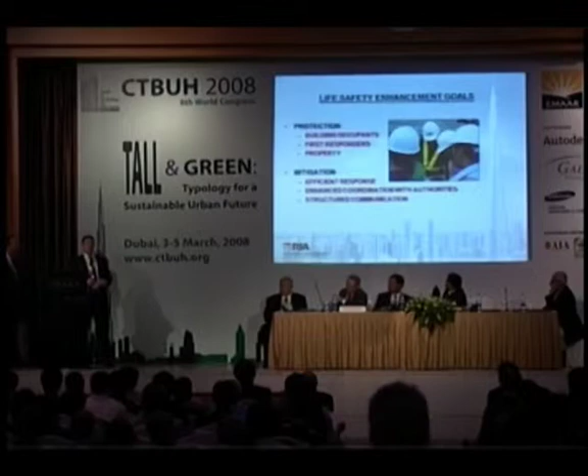So as we take a step back, you always want to identify the goals, and sometimes you get into a building code or a regulation and you're trying to find what the specific requirements are, but on a building like Burj Dubai, you really need to take a step back and identify what is the overall goal of the project. And first is you need to protect your building occupants. You need to make sure it's a safe environment to live in, safe environment to work in.

And then also, if there is an event, you're going to have your first responders come to site, and you need to protect them as well so they have the confidence to enter the building and to pursue any actions that need to be taken. And last but not least is you need to protect your investment, you need to protect your property, and you need to make sure that business continues.

We do understand that there's always the possibility that the systems we've installed will not prevent everything from occurring. So the next step is going one step further into the operations, and if there is an event, trying to mitigate that event to make sure that you have the most efficient response possible and that you can have an enhanced coordination with the authorities so that when they come on site, they're updated, they're up to speed, and they have all the information they need to base their operations.

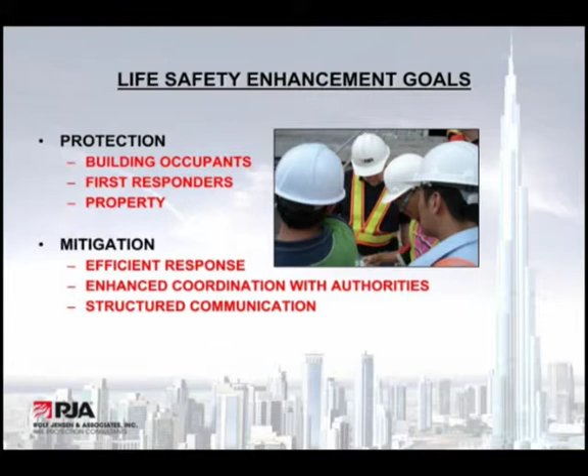And also, we need to make sure that lines of communication are open, but we also need to make sure that they're directed in the right manner, because we don't want two people trying to fight the same effort and trying to push and pull. It just reduces the efficiency of your response.

So, like we'll find in most high-rise buildings, typical building codes would classify a high-rise building as anything over 8 to 10 stories. Well, what do you do at 160? So we're going to first go over some of the basic requirements. Throughout the last couple of decades, automatic sprinkler systems have been required in virtually every high-rise building. And that is to control the fire, make sure that the fire or smoke is not generated in a manner that the building systems cannot tolerate, and also by identifying zones within your building so that if a fire does overcome a sprinkler system, that it can be contained to a single floor so that the zone of incident can be identified and can be manageable.

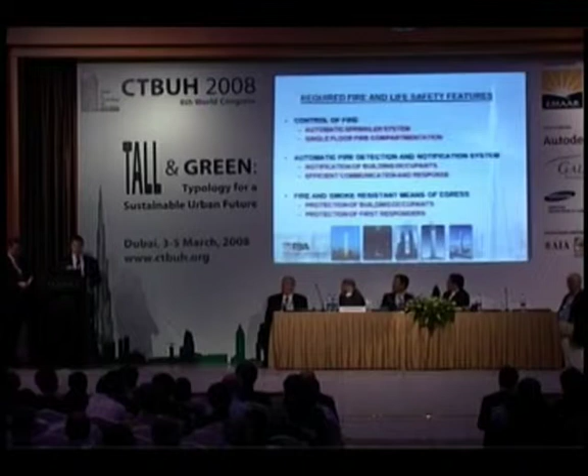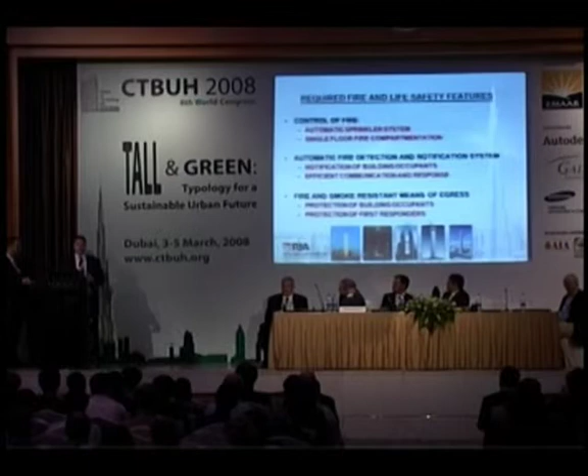Also, if there is an event in your building, how do you tell somebody on the 160th floor? How do you tell the workers, the residents, that there is an incident from the fire command center or from the security desk? So you're going to want a way to notify and, well, first off, to detect an event. And we've gone through the process of identifying ways to notify occupants by floor, through designated areas of the building, stairwells, areas of refuge, so that the information gathering can be enhanced and you can create a more efficient response.

And then also, if there is an event that requires occupant relocation or building evacuation, you need to make sure that you can protect those occupants as they proceed to a safe area of the building. And that's by protecting your stair enclosures, protecting critical service areas in the building, and also protecting the first responders so that they can approach the fire and they can get to their staging area without having to worry of the threat spreading before they can get there.

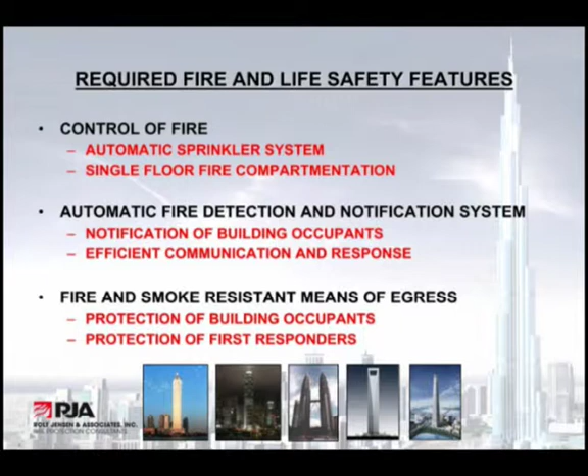So now we'll move on to the meat of the presentation. Okay, we have the requirements. We know what we need to do for a 10-story building. What do you do at 160? There are a number of enhancements that we have recommended, and it is truly amazing how proactive Emaar and SOM have been at prioritizing these enhancements and implementing them in an efficient way. As Adrian mentioned in the morning presentation, one of the enhancements is areas of refuge. Areas of refuge is a very key enhancement for buildings of this size.

What they do is they give us flexibility in how we can respond to an event and how we can relocate occupants. We've identified 4 areas throughout the building, and they are sized so we can accommodate 3 floors. Now, ideally, you'd like to make sure you can relocate all the occupants in a building. However, we've taken an approach to evacuate occupants in a staged evacuation.

We're going to identify the fire zone, we're going to identify the adjacent zones that may be affected, and that is the floor of a fire, 1 floor above, 1 floor below. And those occupants would be notified of an event so that they can relocate down to the nearest area of refuge and they can wait further instruction. The rest of the occupants throughout the building will be notified that there is an event. However, at that time, it may not have proceeded to the point where we'd go through a full building evacuation.

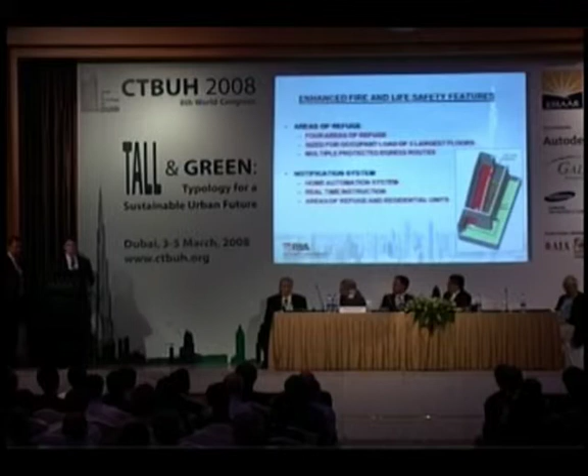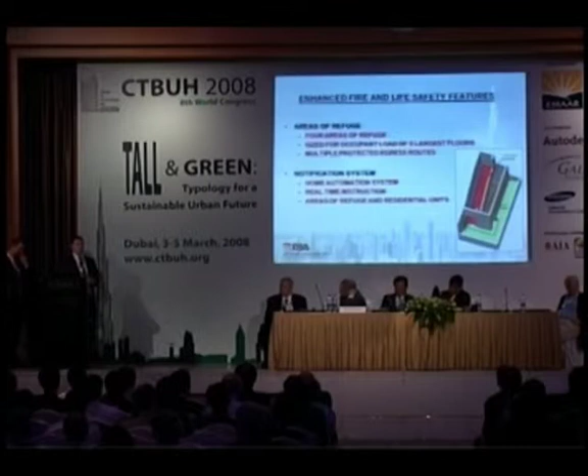And also what it does is the areas of refuge connect the egress stairs so that as soon as you enter one of those exit enclosures, you're protected. You have a fire-rated barrier surrounding you as well as mechanical systems to prevent smoke from coming in and compromising that stair shaft. And it allows you to transfer from one stair to the next. So for instance, if one stair zone is compromised, you're able to direct occupants to another stair without leaving that protected space.

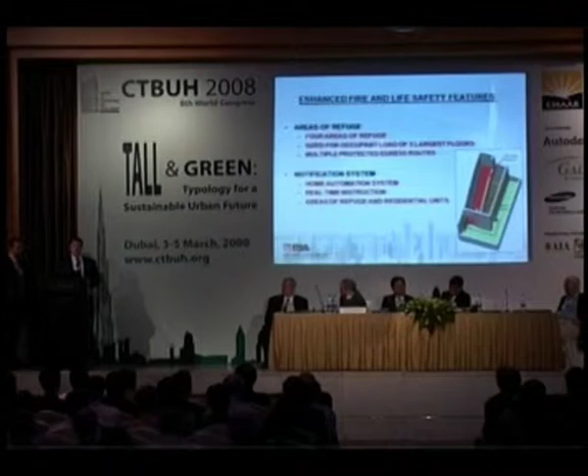As we mentioned, we're going to have a notification system, but we've gone a step further in enhancing that. And if you enter the building, you'd probably never even know it was there. This is the home automation system, which will be installed in various areas of the building, including areas of refuge, and including every dwelling unit, hotel and residential. And that will be an LCD screen that will provide occupants with daily information. It'll be an interface for them to communicate with different building staff.

And then in the event of emergency, we're able to override that and take control of it and provide instructions whether or not they should stay in their unit, whether or not they should proceed to the stairs, and gives them more information so that they can validate any concerns that they've had of an alarm. And it will also provide us with real-time instructions so that you can send a customized message instead of just a pre-recorded voice communication.

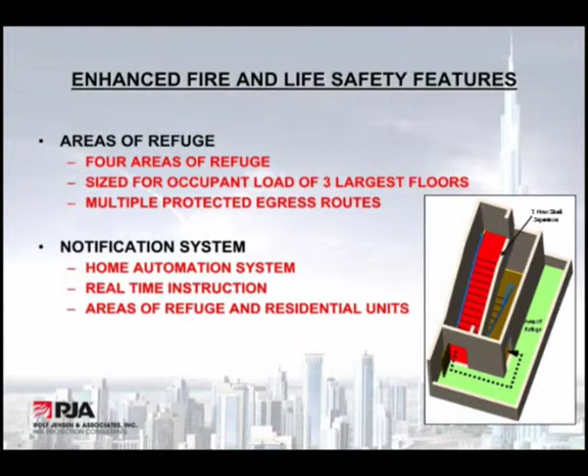Moving on, a very hot topic in fire and life safety today is the elevator-assisted evacuation. And you'll hear more about that tomorrow in the fire and life safety session, one or two, I believe it's 1. But elevator-assisted evacuation is something that has been frowned upon in the past, and it's just unsure whether or not it's a protected system that can provide reliable service for evacuating occupants. We haven't taken any concession for that, but we've added it.

So all the stair enclosures are designed as you typically find in a high-rise building to evacuate occupants, but this is going to be used to provide a protected means to evacuate occupants. It includes water-resistant equipment, includes raised door thresholds at the elevator shafts so that we limit the amount of water coming into the shafts. And it also includes video monitoring capabilities so that before they begin operations, the first responders or building staff can send each cab up and down each hoistway to inspect it to make sure that it's not compromised.

The elevator-assisted evacuation is a very important enhancement because when you're looking at a building that's over 160 stories, you start thinking, okay, well, now is our evacuation time starting to exceed the time we've built into our critical systems? And the elevator-assisted evacuation, we've done a couple of studies on it, and we have found that the scheme that was chosen was in an ideal situation. There's a number of different factors that come into a full building evacuation. But comparing just an ideal scenario of evacuating through stairs versus evacuating through an elevator, you're able to reduce your total building evacuation time by almost 50%, which is pretty amazing when you're talking hours.

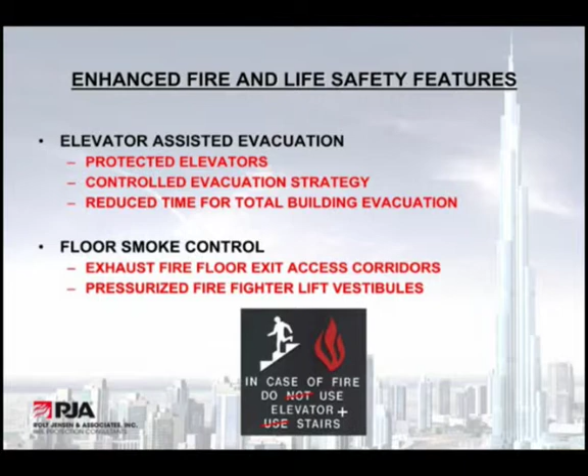And then the last enhancement I'd like to go over is we've also integrated a floor smoke control system. So if the floor goes into alarm, the corridor is exhausted, to give the occupants a little extra time so that they can get into the corridor and into the protected stairway. And the last enhancement John will discuss is regarding the operations side of things, which is another very proactive approach that Emaar has taken.

Thank you. One of the things that we have to look at from our standpoint is how do we manage the building once it's open? A lot of the talk the last few days and tomorrow is about sustainability, about design and architecture. Our focus, once that building is operational, is how do we manage the worst case scenario? What we've done is we've looked at it, and Emaar has been so proactive in thinking like this that they got us involved in developing a comprehensive crisis management plan starting in 2005. So we started way back in 2005, starting to think about all the different scenarios that we might have to face with a building of this size and nature.

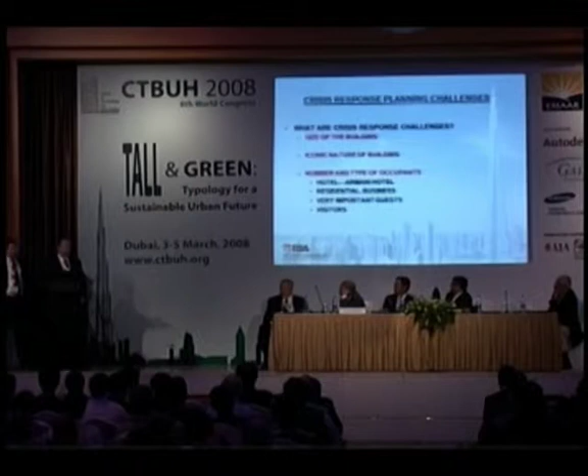First, I think the key issue that I face coming from a fire protection company is there's a misconception that the only crisis that's out there is fire. Realistically, in a situation in a building like this, in an environment like this, my biggest concern is not a fire because of the structure and the systems that are in place. It's more of a situation in the middle of July when the generators fail and the electrical system fails. And now I have a full building of occupied floors, and now I have to get them out. And that's a bigger concern to me.

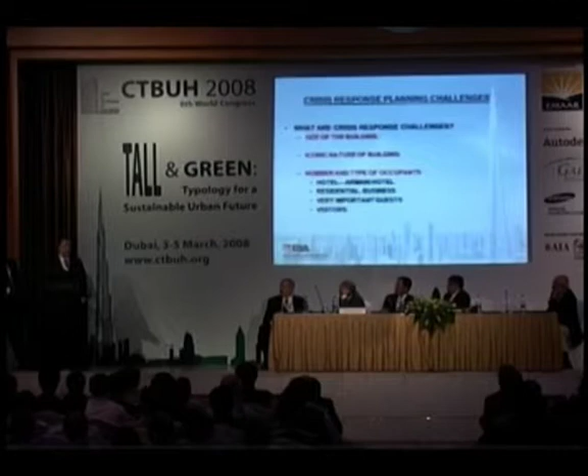What are some of the challenges we face? We face the pure size of the building. It's 160 floors. It's a large building, and it's spread out over a lot of area. The iconic nature of the building. Obviously, it's going to be the world's tallest building. It also becomes a target to somebody who wants to do something negative towards Dubai, towards the UAE, or towards a U.S.-friendly ally. So we have to build that into our responses.

And also the number and types of occupants. This building is going to have a hotel, which is an Armani hotel, which brings its own classification of VIPs. We have residential and business occupants. We have very important guests. We might have former heads of state that come here. And we also have visitors. We might have a wide range of visitors from a toddler at 2 years old to somebody that's 85 years old. And we have to build all this into our response procedures. And that's why Emaar got us involved very early on in 2005.

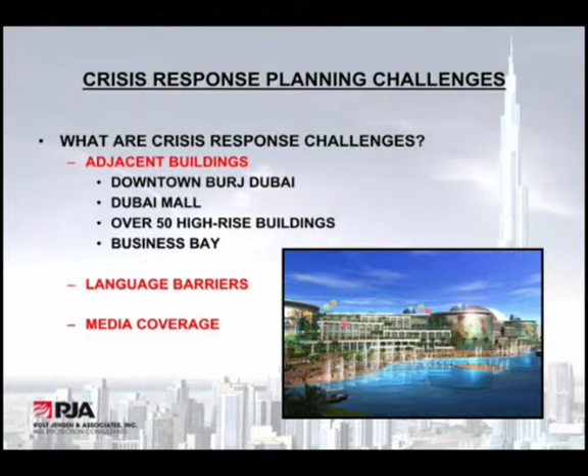Some of the other issues we have: adjacent buildings. As it was said this morning, it's in downtown Burj Dubai. Downtown Burj Dubai has over 50 high-rise buildings, including the Dubai Mall, which is connected to the tower. Now, the Dubai Mall is going to be what's considered the world's largest mall. It also has an occupant load that is ridiculous. So our concern is, how do we manage that? If something happens at the mall, we have to be able to understand how to respond to that, and vice versa. And also Business Bay. Business Bay adjoins downtown Burj Dubai, and there are parcels that are not developed by Emaar that we have to coordinate our responses with.

Language barriers. Everybody in this room can tell me the same thing. There are going to be language barriers. The concern we have is, how do we get our message out there concisely and uniformly, but in a way that somebody can understand what they're supposed to do? And obviously media coverage. I think that speaks for itself. If something happens at the building, it's going to be international news.

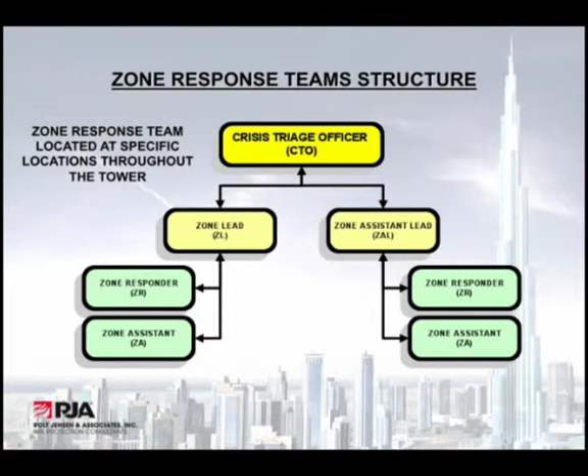Also, we identified zone response teams. As I talked about, we have to have zone response teams that are organized. We want to make sure they're identified to be able to help out in their zones. We wanted to identify the building services people that are there because they know the building. They know what's going on on their floors. Instead of trying to send a group of people to a floor that they don't know, we'd rather use the people that understand what the operations are. The other thing we wanted to do was make sure it was a clean structure, because we wanted to make sure the information flow during a crisis was a uniform flow from the crisis command team to the people that need the information and back.

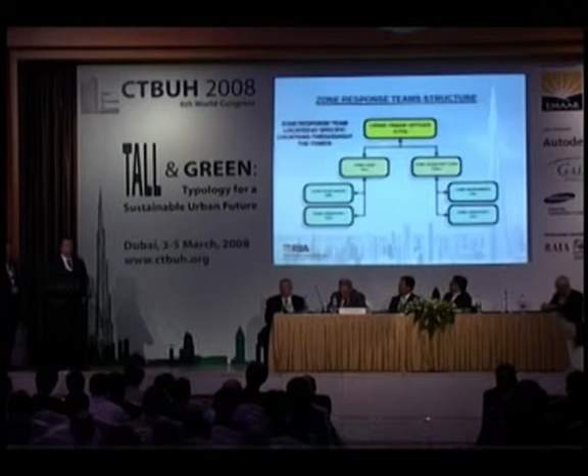The crisis levels: we wanted to create a scalable response level. Anywhere from a crisis level 1, which is a situation — an example would be somebody has a heart attack. It doesn't affect the 160 other floors, but it affects that one person. As opposed to a level 4 emergency, where it could be multiple building zones in a fire situation, and it requires a different response.

Well, this is just a brief list of the response procedures that we've developed. We broke them down into 4 different categories. We looked at building system related situations, human related, terrorism related, and weather related. We also added a tsunami response procedure. It's probably not going to happen in Dubai, but you never know. We wanted to make sure we had it in place just in case something happened. And each of these has 4 different response levels tied into the overall procedure.

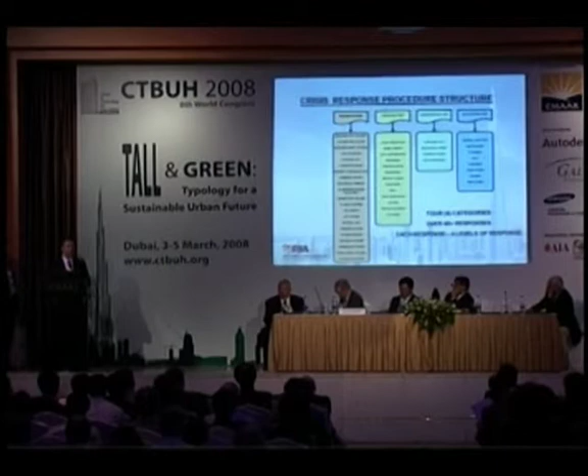One of the key questions was about evacuation. Not every procedure requires an immediate evacuation. It might need a shelter-in-place response as the initial response. All we're trying to do with these documents in our crisis response plan is to provide that initial response until the civil defense or other local authorities arrive. Once they arrive, we become a subset to their team.

And I think one of the big things that gets forgotten in crisis response plans, but we're trying to identify for this building and this site, is mutual aid support. We might not have all the resources, manpower and materials to manage a large-scale response. If you talk about evacuating 12,000 people off the site, we're going to need transportation. We might need more materials. We might need operational support from the mall or from one of the other parcels. And we might need consumable support. If it's a hot day in the middle of July, we might need food and water. So we're looking at that early to identify those key contacts and make arrangements with those providers early.

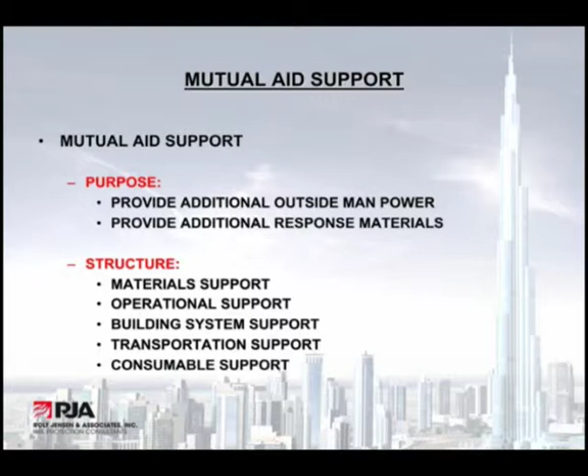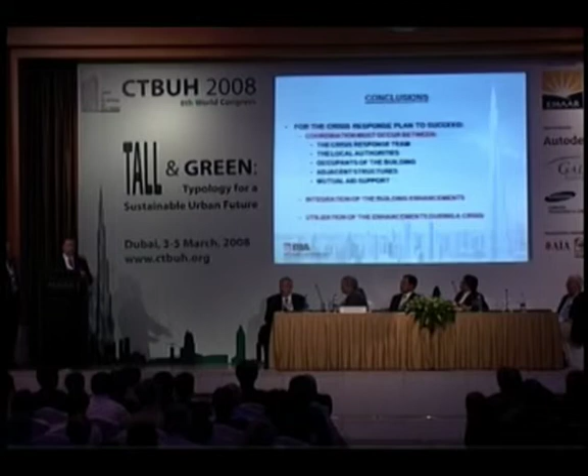And I think the biggest key for us is Emaar has had a very proactive approach when it comes to crisis management. We started this project and we did the tower. Once we started doing the tower, they realized after several discussions that they need to incorporate this into downtown Burj Dubai. Since then, we've started working with them on crisis response plans for every single one of the parcels, as well as a site-wide crisis management plan. Because at a site-wide level, there are infrastructure issues we have to deal with, such as traffic, electrical service, and gas service. We need a global response and individual parcel responses that coordinate with the overall plans. So for this kind of plan to succeed, we need coordination between everybody.

It's the crisis command team, that's the Burj Dubai Management, the local authorities, the occupants. The occupants have to know what they should or should not do. Our concern is if we tell them to do something, we need to make sure it's the right information. The adjacent structures: if something happens at the tower, we need to make sure that the mall knows, that the Palace Hotel knows, all those areas know.

Integration with building enhancements. We need to utilize the building enhancements, such as area refuge floors, the fire alarm systems, the automatic sprinkler systems, and utilize those pieces to assist with our response procedures. Realistically, it's utilizing those enhancements during an emergency situation.